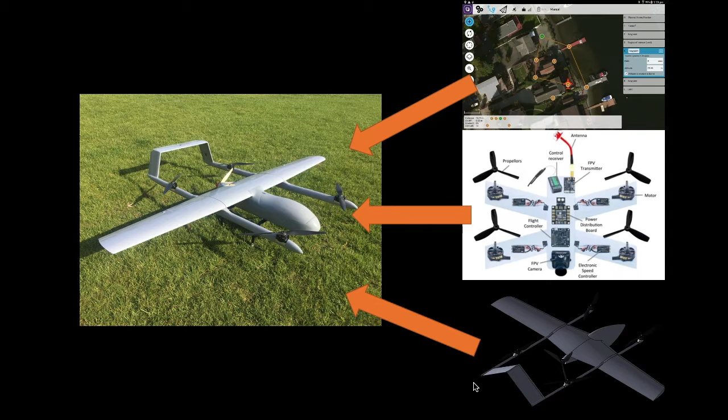Besides our main project, we like to also just have fun as a side of BRES. We have our own aircraft which we just take out and fly, if the weather's good, making the most of the time in the university's facilities. We have a full FPV racing drone race course with our own racing drones, which we are definitely looking forward to making use of this year. However, if you are a beginner, we do have simpler, more stable aircraft to learn on before advancing to those faster and more responsive racing drones.

So always the fun part that we all have to do is the health and safety. I'm just going to keep this kind of simple and drone specific. There are lots of different health and safety aspects which you'll be involved with in BRES, however I'm just going to go through the drone side of things. I know a lot of it is not going to be applicable for the moment, however we're just going to go through it and get it sorted beforehand so that when it comes to the actual fun activities, we don't have to go through it all again.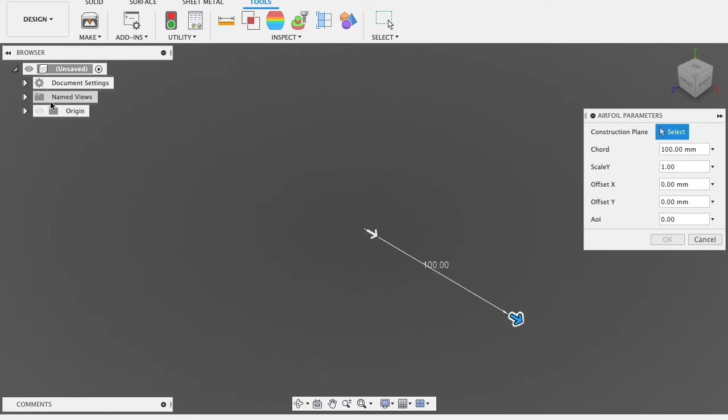Now we can go back to Fusion. Once you've completed all of that, I'll go through the process again. We're going to go to Tools, Add-ins, Scripts and Add-ins, Airfoil DAT Spline version 2.0, click Run. For the construction plane, I'd suggest using your XY axis.

You can just click under it, under Origin in Fusion. So for chord, for example, we'll do 300 millimeters, scale, and we won't have any offsets.

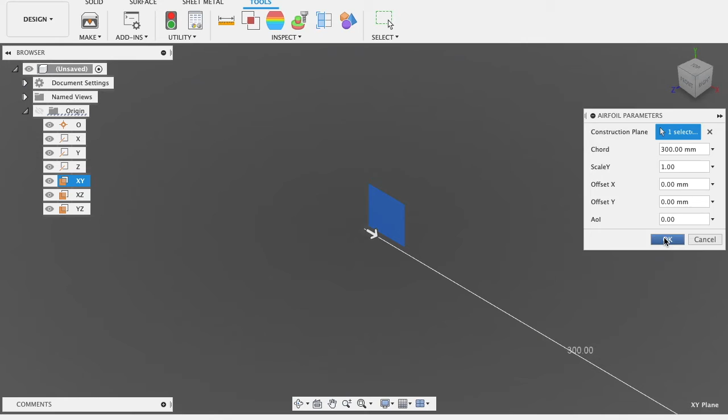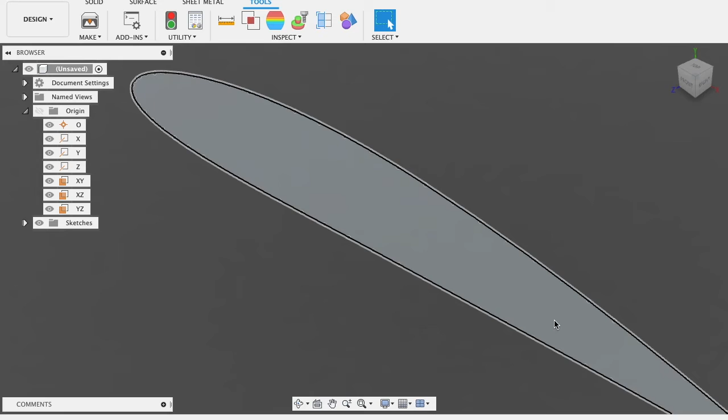Now you'll select your DAT file that you had earlier - this was our airfoil that we created. Click Open. So there you've installed it - if you click on it, you'll see it creates a profile.

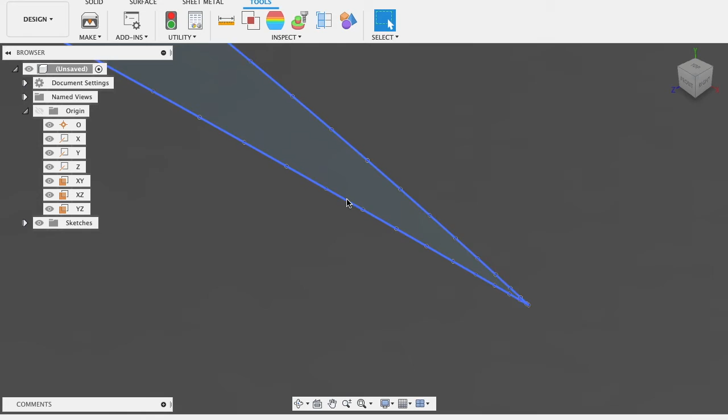If this doesn't happen, it's highly likely you may not have selected to close your airfoil - it will be open at the end. If that's an issue, you can just quickly click on it, create sketch, select it, project.

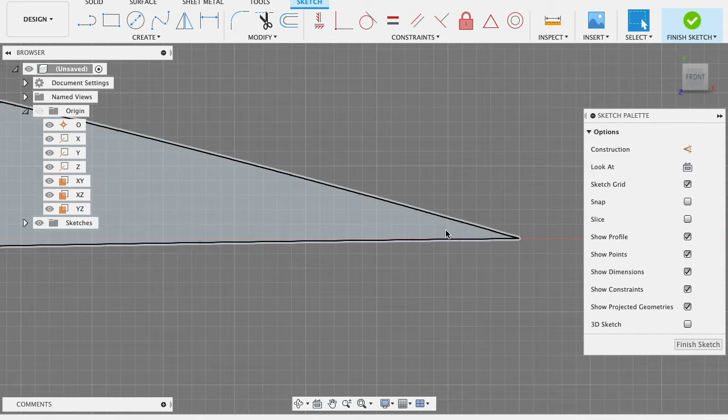And now you'll be able to close up your endpoints. Obviously I can't do it in this case as it's already all closed, but if yours isn't creating the profile, this will probably solve your issue.

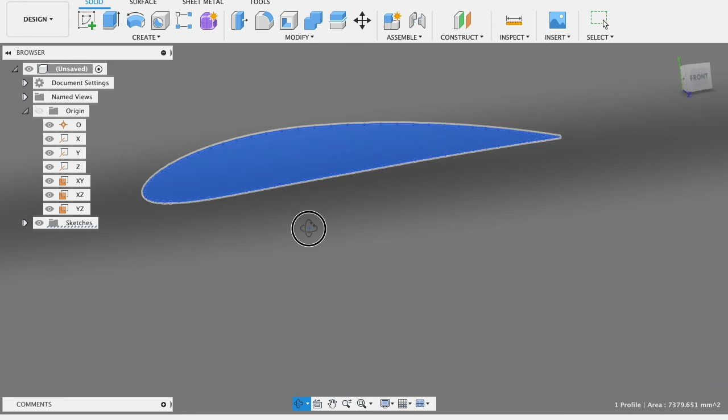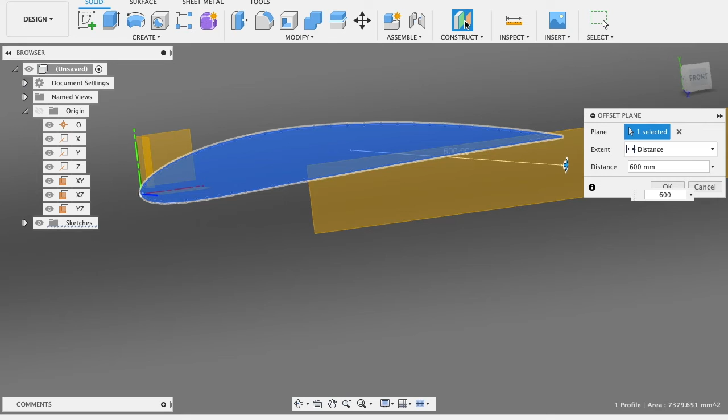Okay, so now we've got our initial airfoil. In order to create our wing, in this example we're going to taper our wing back a bit. We'll select our object, Construct Offset Plane - this will be half your wingspan. In this scenario we'll go 600 millimeters. You can use any amount you want within reason, but I'd keep it under 1000 millimeters.

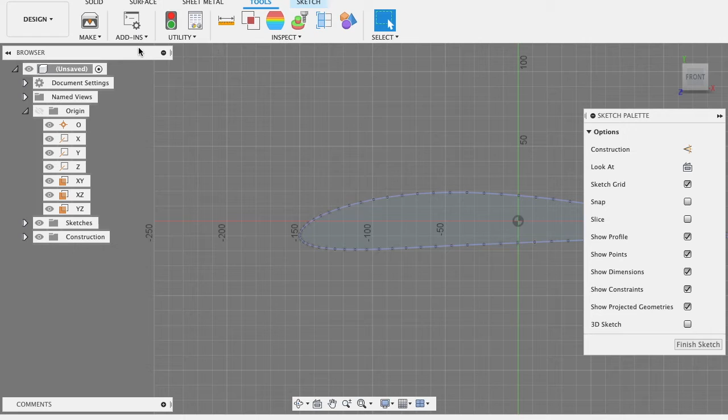Okay, here you can see we've now got an offset plane. We'll now create a sketch on this plane. Tools, scripts and add-ins, create, run. We'll select our construction plane, plane 1. You can see we've now selected it. It's found under construction, plane 1.

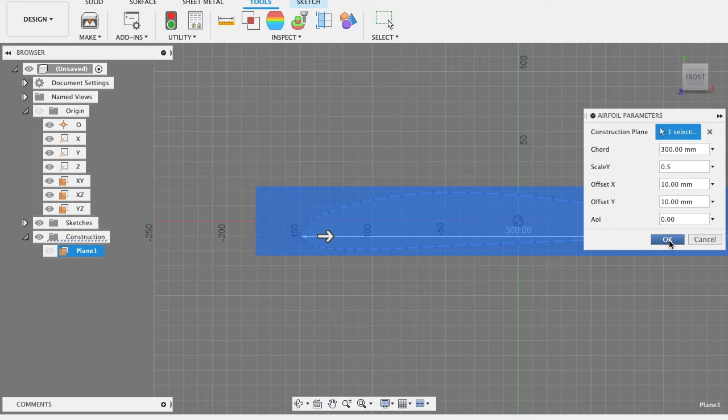Chord, we'll put the chord as the same as original line, 300. Scale, we'll halve it, 0.5. And offset on the Y. Let's X offset it. We'll add some dihedral and some sweepback, so we'll make both 10. Okay, so now we'll select our airfoil again.

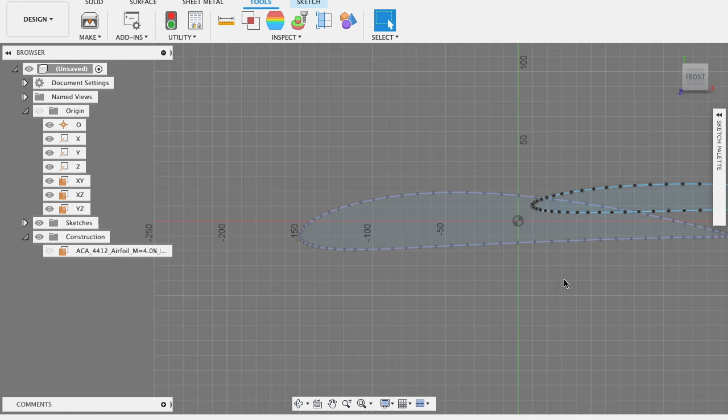In this example, you can select another airfoil, which will produce a different airfoil at your wing root versus your wing tip, which assists in your stall of your wing, whether you can choose whether your wing's tip stalls first or your root stalls first. However, in this case, we're just going to keep it simple, keep it the same. Open. Okay. So now you can see we've got our second half of our wing. Well, our second profile to work from.

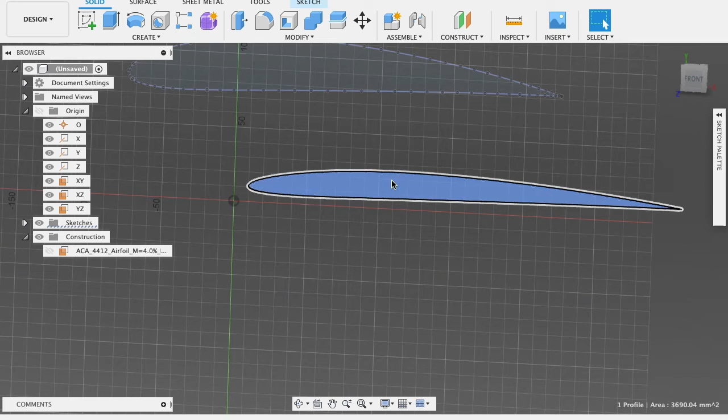So in this example, if we want, we'll add a winglet to the end of it, just for the fun of it. We will select our end piece, create sketch, and sketch. Okay, now just for fun we can, first things we've got to do is select our shape, create, project include, and project it. Okay, so now we can work with it right onto this new sketch.

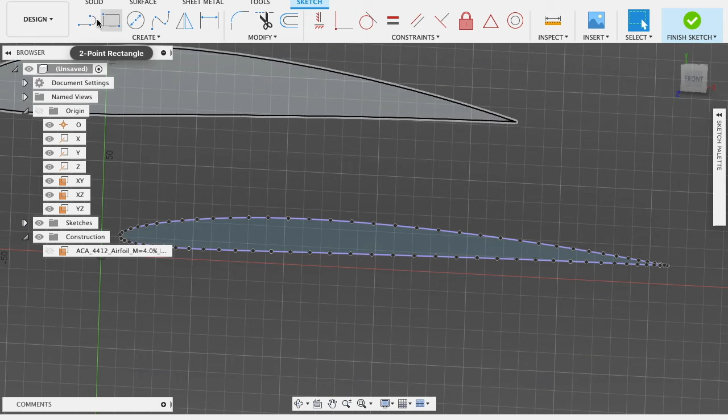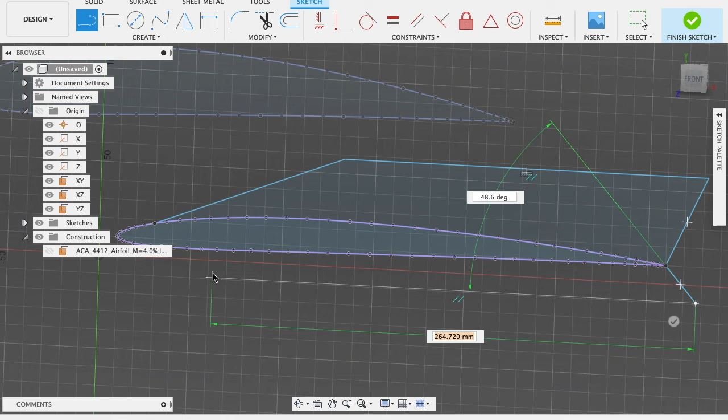So we can go back to sketch, line. You can go probably as crazy as you want with this. However, I wouldn't, have fun. I'm just going to make something fairly simple here. Okay. Okay. So now we've got our end piece. So now we're actually going to connect everything. So to do this, we're going to go finish sketch.

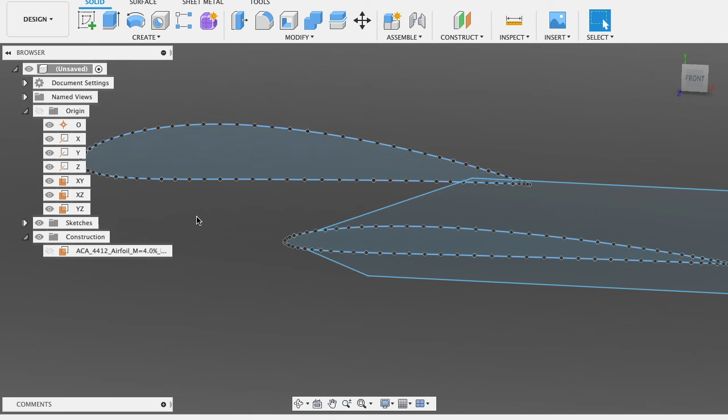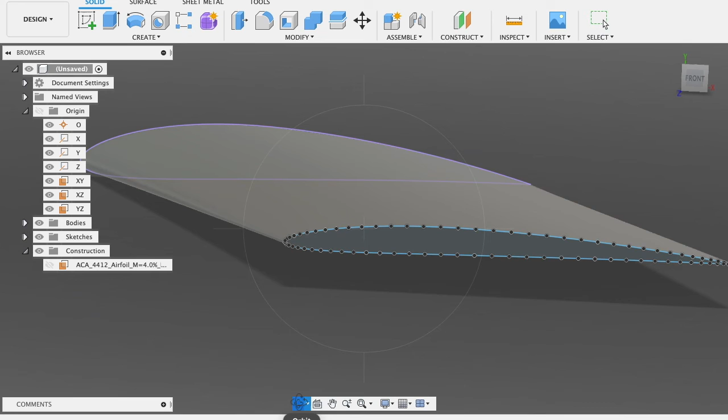Okay. Select our first face. Create. We're going to use the loft tab. Our first profile selected. Then we'll select our second profile. Operation new body. Okay. If you look there, we've now created our half of our wing. Okay, it's gone and it's hidden our end sketch. In this case it's going to be sketch 3, but we're going to show it again.

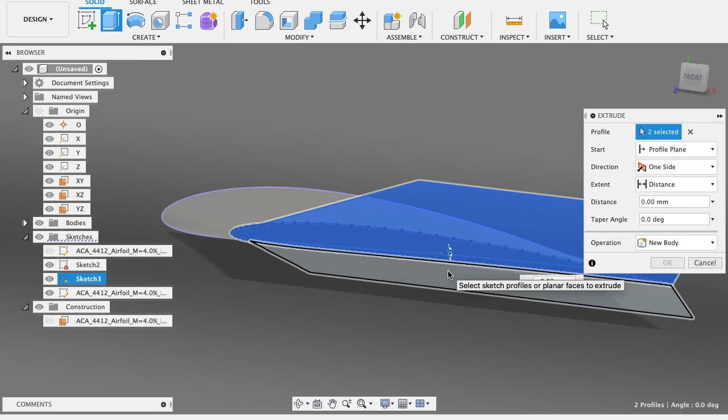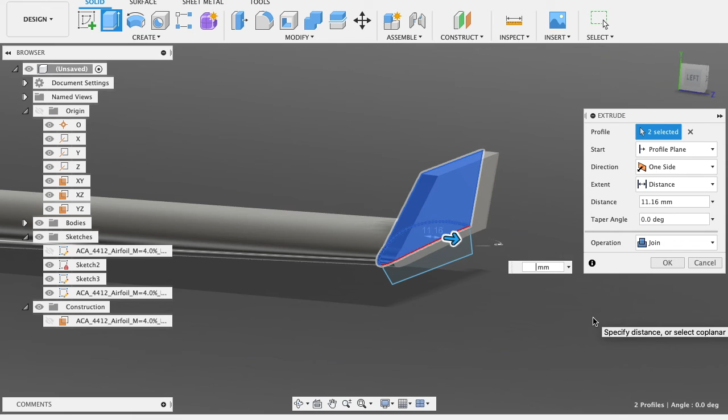And we're going to extrude, select the 2 faces, and in this scenario we won't give it an exact, you can just take the arrow, pull it as far as you want or think necessary. In this case, let me just go with 3 millimeters. Okay, so there we go.

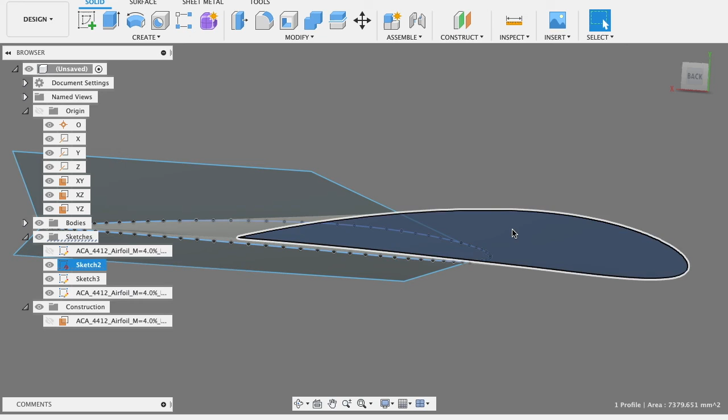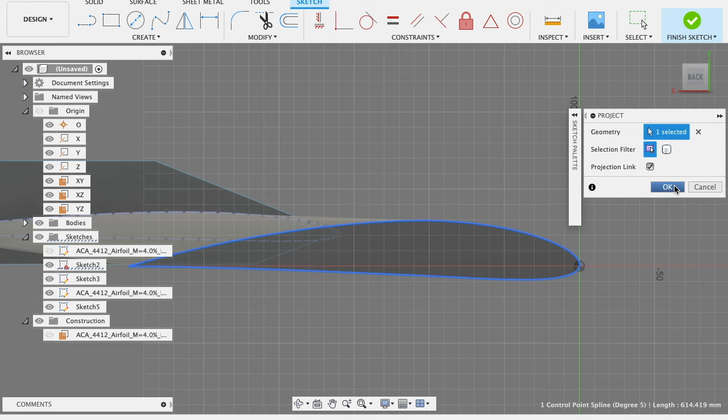For fun in this scenario, I'm going to just add a vertical stabilizer. Exact same process pretty much. We're going to select that face, create sketch, select, create, project. Okay. And we'll just create ourselves like a quick... This is your vertical stabilizer.

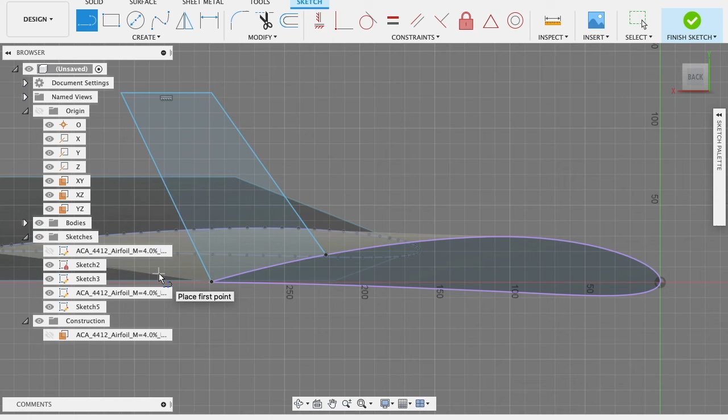You could add control surfaces such as your rudder and your ailerons to this model. However, for the process of doing a CFD analysis of this further on, it's not really necessary. If you're actually planning on flying it, like 3D printing it and flying it, you would cut those control surfaces in, but in this case we won't be doing that.

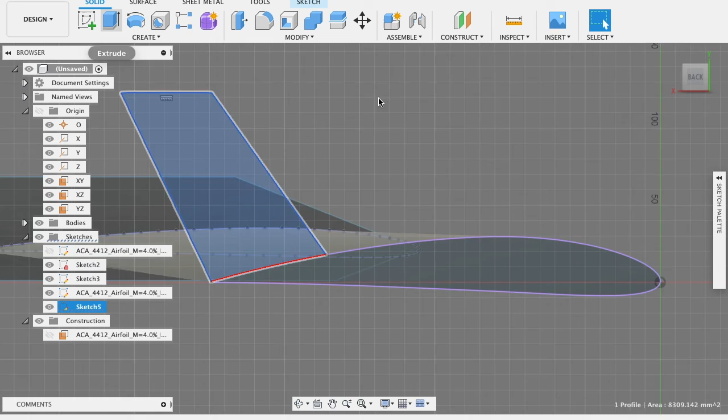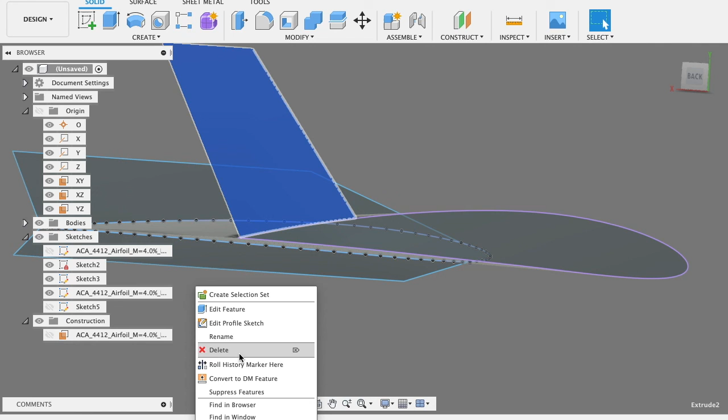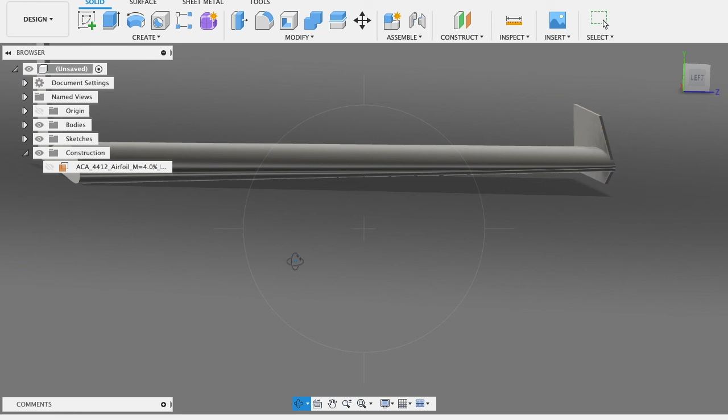So we'll just select here, solid, extrude. Important here is to select symmetric so that it extrudes it on both sides to make it even. Distance we'll go as being 3 millimeters again. Join. Oh, okay. Let me edit that one quickly, sorry. Edit feature. Join, it's going to be a new body. Okay. So I can hide the sketches now and give you a full view of half of the flying wing that we have created.

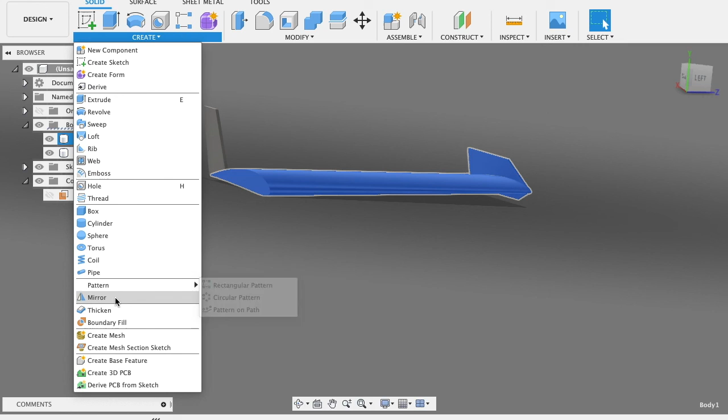Okay, so now we're just on the downhill. In order to finish it off, we're going to go under our bodies tab, just find out which is body 1, select it, that's going to be our main wing and our wingtip. Create mirror. Okay, mirror, we've selected our object, it's in blue. Now your mirror plane is important. Your mirror plane will be whichever initial plane you selected. Remember, I selected the XY plane.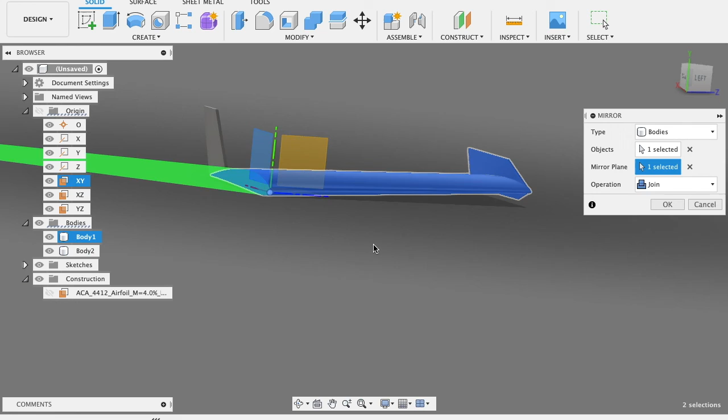If you had selected XZ or YZ, that is the plane you'll be selecting, but I selected the XY plane, so it's going to create another half across that. We'll join them, and there you go. That is your complete flying wing. We'll do further analysis and testing that in the next session, but that's it for now.